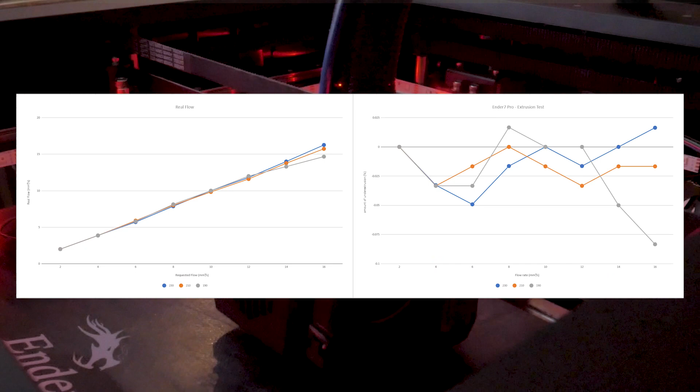And what this does is that it prints out a sequence of blobs at various temperatures, so 230 degrees, 210 degrees, and 190 degrees Celsius, and it increments the flow rate. Then you take the extrusion blobs, you weigh each one, and you insert those values into an Excel sheet that Stefan also made. The Excel sheet then plots the data, and what you should see in theory is a drop off between the requested flow rate and the actual flow rate.

The decline in actual flow rate, or under extrusion, should increase as the nozzle temperature drops. And this will become more prevalent as you request a higher flow rate from the hotend. Now, this is the general trend that I observed, but my data was not nearly as clean as Stefan's.

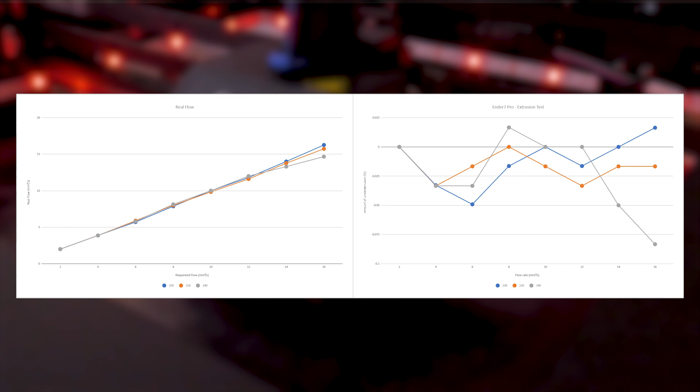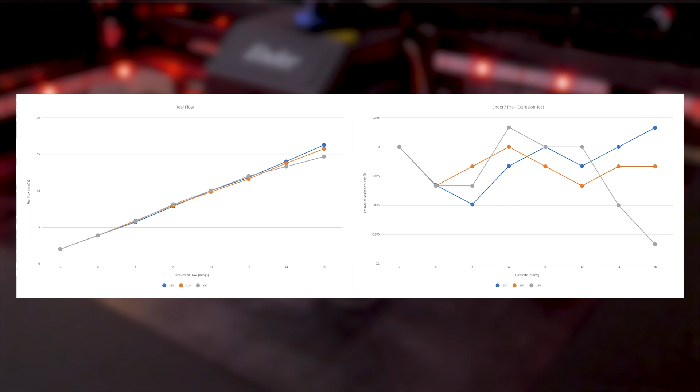I suspect that one of the reasons for this is that prior to this experiment, I was running a lot of carbon fiber filament through the brass nozzle, and I do believe that it is no longer a 0.4 millimeter nozzle. And so even with PLA, I experienced a lot of stringing and oozing, and I feel like that somewhat fouled my results. Also, as a result of the suspected larger orifice, I do believe that the flow rates are also skewed, and so I ran the test again with even higher flow rates to see if I could get an even more prevalent drop off in extrusion.

And according to this second test with the higher flow rates, you really see this hotend start to drop off at around the 18 cubic millimeters per second requested flow rate at the lower extrusion temperature of 190 degrees Celsius. The tests at the two higher extrusion temperatures of 210 and 230 degrees Celsius do not seem to drop off at all the way up to 22 cubic millimeters per second. And this is a much higher flow than what I've seen this hotend be able to do in practice.

And so when I go to tune my high-speed printing profiles in the slicer, I pay close attention to the volumetric flow rate. And before this nozzle got bored out by the abrasive filament, I would say that around the 15 cubic millimeters per second mark is when I started to see noticeable under extrusion in my parts with the stock Ender 7 hotend. Now, unfortunately, I didn't have a spare Ender 7 nozzle to run the tests more reliably, otherwise I would have.

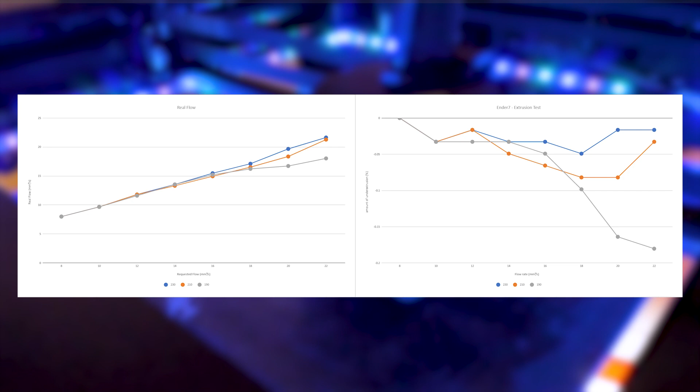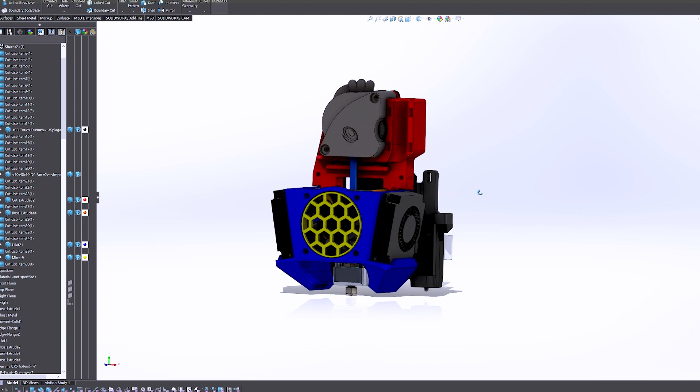And now that we have a slightly better understanding of where we're coming from, let's take a look at where we're going. This is my CAD mockup of the LGX Lite combined with the Mosquito Magnum hotend mounted on to the Ender 7 X-carriage bracket. This setup comprises four main parts. So in yellow, you have the fan grill. In blue, you have the fan ducts, which the part cooling fans mount to.

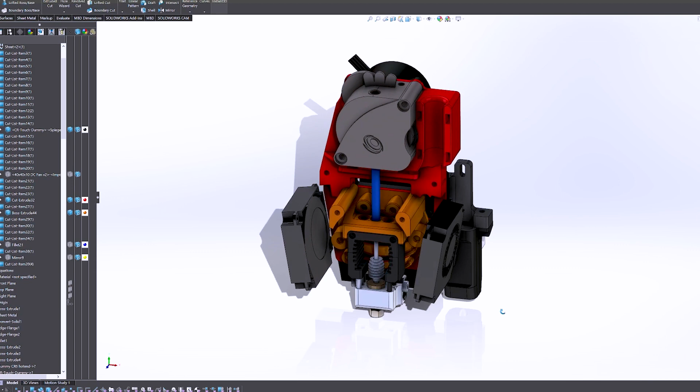And behind the hotend fan, you have the mount for the Mosquito Magnum hotend, and that's pictured in orange. I intentionally made this a separate piece from the red mount, which mounts the LGX extruder to the Ender 7 X carriage. And the purpose for this is that in the future, if I ever want to switch hotends, I can do that by simply swapping out that bracket, and in some sense, this makes this design modular. In the meantime, I suspect that the Mosquito Magnum hotend will more than meet my requirements.

Now we can begin with the disassembly of our current equipment, and the first thing you need to do is remove the filament from your Bowden tube. Just preheat your nozzle, use the lever to release the tension on the filament, and give it a good pull. And with the printer still on, lower the printer down so you have maximum access to the hotend from all angles.

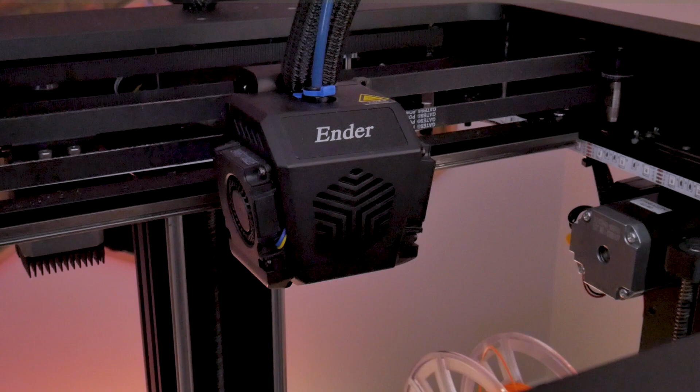Start disassembling the print head by removing the 4 screws that hold each of the part cooling fans onto the fan shroud. Be careful not to lose these screws, as we will be reusing them later. Now you can head to the back of the print head, where you can access the 2 M3 screws that secure the fan shroud. With those 2 screws removed, you can now simply pull the fan shroud off. There are 2 plastic tabs that hold the fan shroud onto the X carriage as well, so just be careful not to break those.

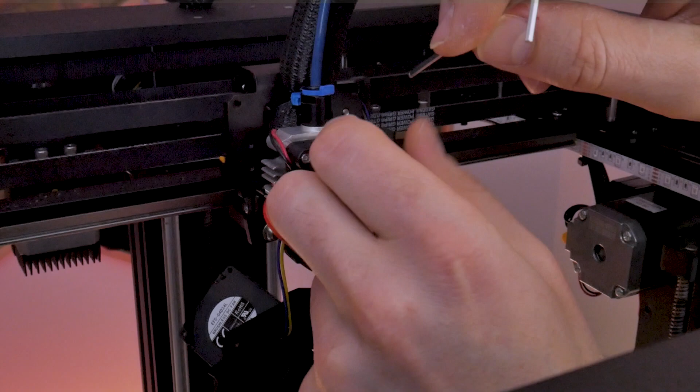This now exposes the heatsink cooling fan, and we can use our hex key to remove the 2 M3 screws holding the fan to the heatsink itself. There are 2 aluminum spacers wedged between the fan and the heatsink, and you will not be needing to reuse those, but they'll likely fall out during the removal of that fan.

Now you can remove the Bowden tube by removing the retaining clip, pushing down on the fitting, and pulling up on the Bowden tube. Now, it's not uncommon for the Bowden tube to get fairly stuck, and that's likely because of hardened plastic near the bottom of the tube. And so if you have to, you can turn your printer back on, turn your nozzle temperature up, and then pull on the Bowden tube, and it should release much easier. Just be careful, because you'll be working around some very hot parts.

Remove the heat block sock, and then take a look under the heater block for 2 small grub screws that are holding the heater cartridge and thermistor into place. Loosen them liberally. You can now remove the heater cartridge and thermistor from the heater block. Do not pull on the wires, as you may damage them. They could be brittle from all of the heat cycles. Rather, you can push from the other side using one of your hex keys.

Now you can remove the 4 screws holding the hot end into place, and you should be able to completely remove the hot end from the X carriage bracket. Cut any zip ties holding the wiring harness into place. My wiring harness might look a little different from yours because I've installed a CR Touch,

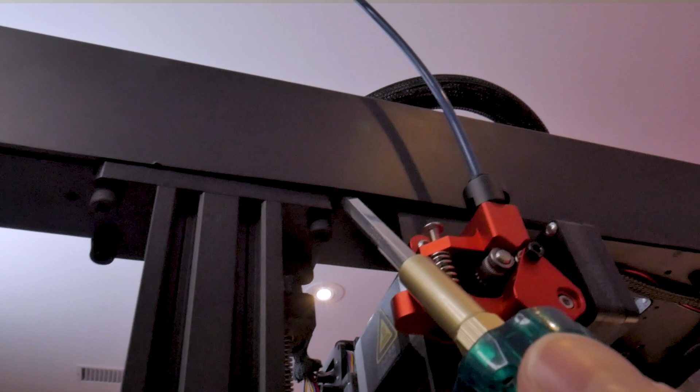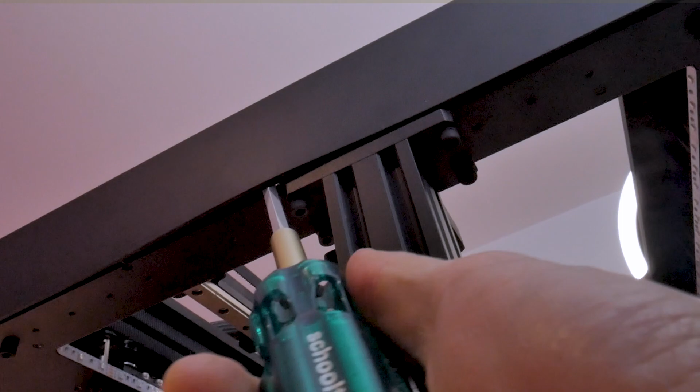Now we need to remove the plastic shroud at the top of the printer, and there are 4 M4 button head cap screws at the front and 4 at the back. After removing all 8 button head cap screws, take a look at the sides of the shroud beside the vertical pillars of the machine. There should be slots in the shroud, and you should be able to get a flathead screwdriver in there to pry up and release the shroud from the main plate at the top of your 3D printer. It can be frustrating to get this piece to finally release, so take your time and try not to break it.

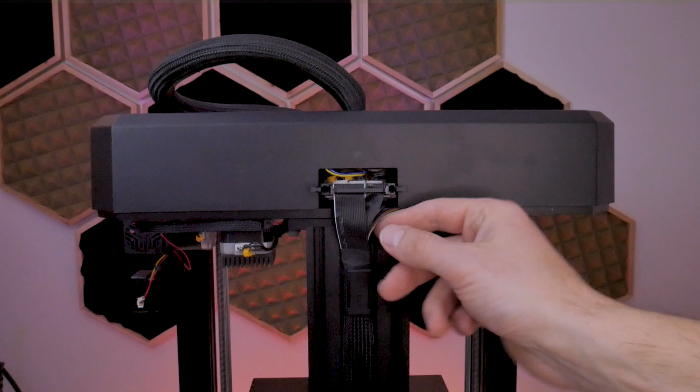When you do finally get it to release, move to the back of your printer and remove the large electrical connector. You can now access the breakout board where all of your printhead connections go to. It's a tight space to work within, so we're going to take a look at which connections we have to remove, and I'm going to do my best to get some good shots of that.

I'm going to be disconnecting all of the connections that run back to the printhead, and that white one that I just had in my hands there, that is for the thermistor. There is the red and black wires that go to the extruder fan. There's the 2 thicker large red wires, and that is your heater cartridge. And beside that, you see blue and yellow wires. There's 2 of those connectors, and those are the part cooling fans.

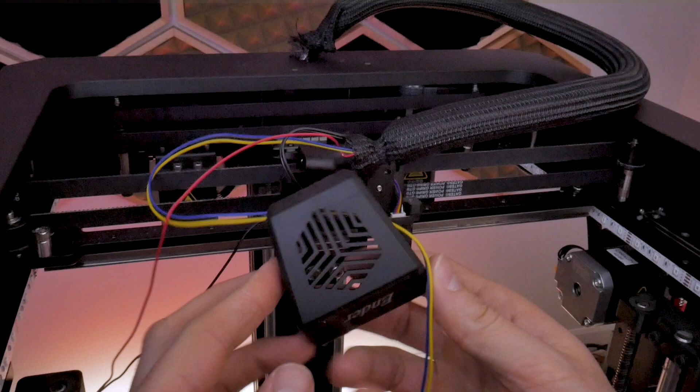And then beside that, there is 2 black wires with a label that says X on it, and that is the X limit switch. If you look very closely on the PCB, all of these connectors are labeled, and some of the wires have labels on them as well. I'm going to be pulling all of these connections out because I'm going to be running a new wire loom. But if you plan on reusing the Creality wire loom, you only have to pull a few of these out.

The one that you see me pulling out right now is the part cooling fan on the left hand side of the fan shroud. The reason you have to pull this one out is because we're going to be printing off a new part cooling fan shroud, and the only way to get that fan to release from the existing fan shroud is to pull it through that whole connector side out first.

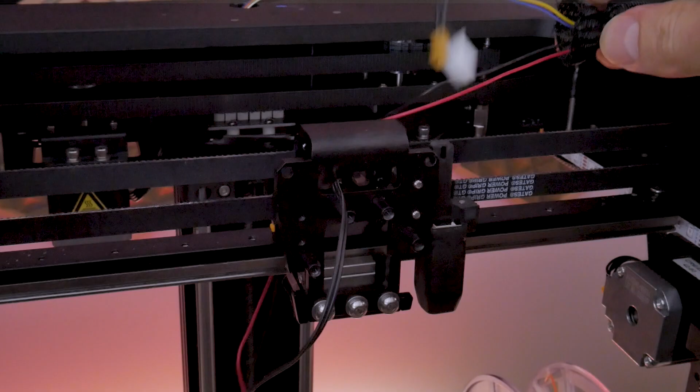At minimum, you will also need to pull out the existing heater cartridge wire, as well as the X limit switch wire. And in my case here, I'm running a CR Touch, and so I'm going to pull that one out and through that little window in the X carriage bracket. What you should be left with is a very bare looking X carriage bracket ready for the new parts to be mounted. And speaking of new parts, let's take a look at what we're going to be installing.

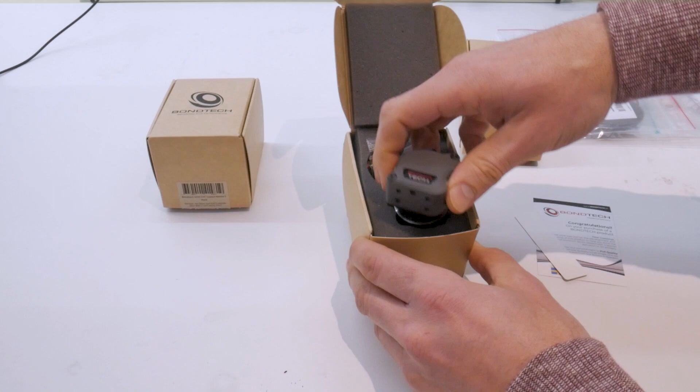So first up from Bondtech is the LGX Lite extruder. It comes nicely packaged in this box, safely sitting in a generous amount of foam. And included with the LGX Lite extruder is some mounting hardware for the extruder itself.

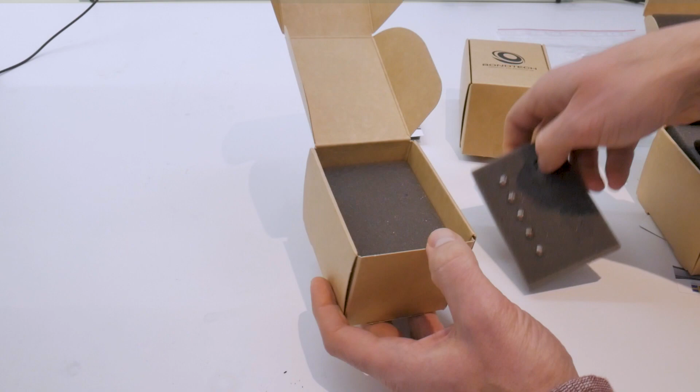Bondtech also sent me their CHT coated brass nozzle pack. So this comes with 5 different nozzles in the 0.6, 0.8, 1mm, 1.4mm, and 1.8mm sizes. And that is definitely going to be for some high flow applications in the future. For the time being, I'm going to be testing the machine with the regular 0.4mm CHT nozzle, and we'll take a look at that in a second.

And in the final box is the Mosquito Magnum hot end from Slice Engineering. Now, I don't know what type of packaging this is called, but oftentimes I see it used in machine tooling. Either way, it is very difficult to get open. But I guess it ensures that your parts arrive in one piece and in good condition. I've also heard that these lollipop things that they include are absolutely phenomenal, but I've yet to try them.

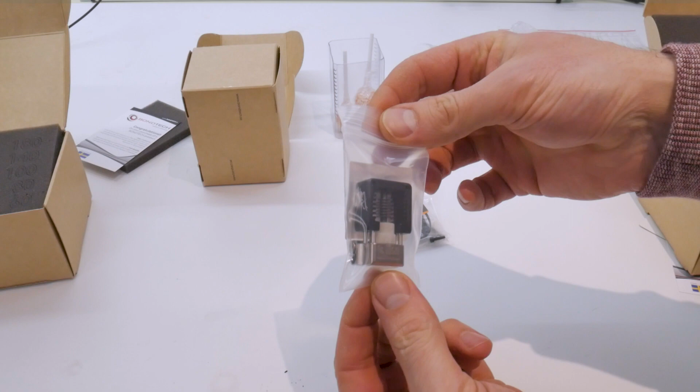What I'm definitely more excited about is the Mosquito Magnum hot end itself. Now, I've used this hot end before in another kit combined with a Bondtech DDX extruder in the past on a Creality Ender 5 Plus, and it was phenomenal. So I'm expecting similar results.

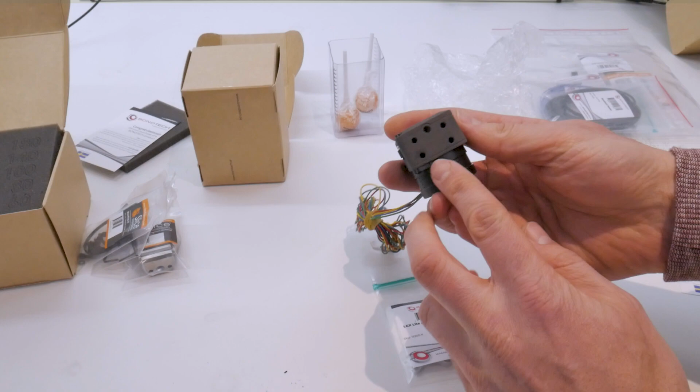Bondtech also sent me this aluminum mount that allows you to mount the Mosquito Magnum hot end directly to the bottom of the LGX Lite extruder. Now, I won't be using this bracket and you won't be needing it for the Ender 7 application, but it is something that they sell on their website if you're cooking up your own custom application. In addition to all of the main components, Slice Engineering and Bondtech also provided me with all of the smaller bits and pieces like the heater cartridge, thermistor, boron nitride thermal paste, etc.

Before assembling anything like I did here, there's a couple holes you're going to need to tap for M3 threads. So these 2 small holes underneath of the extruder at the back of the extruder mounting bracket, as well as this hole here on the hot end mounting bracket, this one here, and that one there. If you don't have an M3 tap, the threads from the M3 screws will likely self-tap into plastic anyways.

Now we can jump into the assembly of these parts, and the first thing you are going to need to do is remove the 2 screws holding together the Bondtech LGX Lite extruder. Keep a firm grip on the entire assembly, because once you remove these 2 screws, the whole thing will fall apart in your hands if you don't have it all clamped together. You can flip the extruder upside down, simply remove the motor.

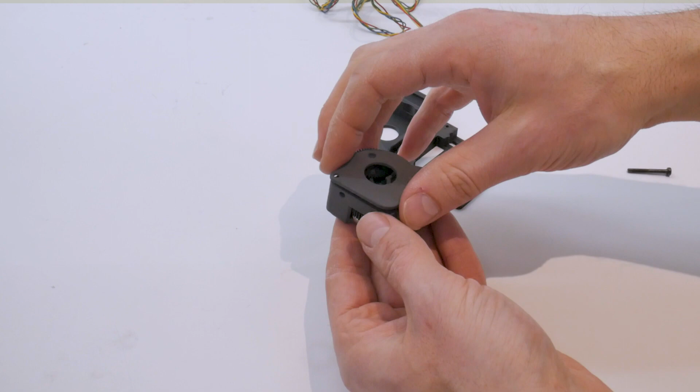Now you're going to remove that middle spacer plate, and you're going to be replacing that with the 3D printed bracket for the LGX Lite that I've provided for you guys in the video description down below.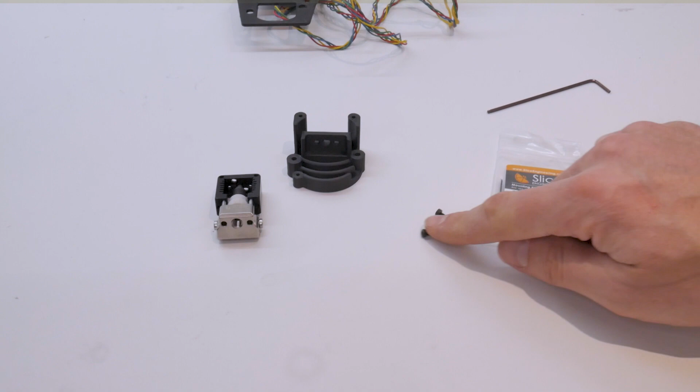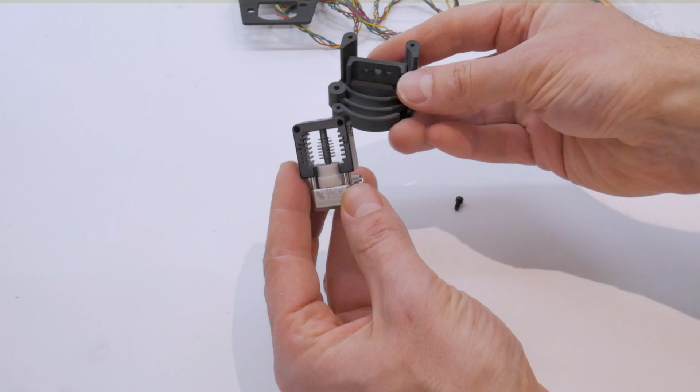Now we can take the Mosquito Magnum hot end along with the 3D printed bracket and the M2.5 by 6mm long socket head cap screws from the Slice Engineering Mosquito Magnum mounting kit, and we're going to combine these items. So you're going to take that Mosquito Magnum hot end, slip it into the bottom of the bracket like so. You're going to have the Slice Engineering logo facing forwards, and then in the top 2 outermost holes, you're going to install those M2.5 socket head cap screws, and they should fit right through the top of the mounting hole locations in the top of the Mosquito Magnum hot end.

This mounting bracket sits very close to the heater block on the hot end, and so you're going to want to print this part in a material with a higher heat resistance than something like PLA. Air from the extruder fan is constantly blowing over this part through the heatsink, but I wouldn't take any chances and still try and print it in the highest temperature resistance material that you can.

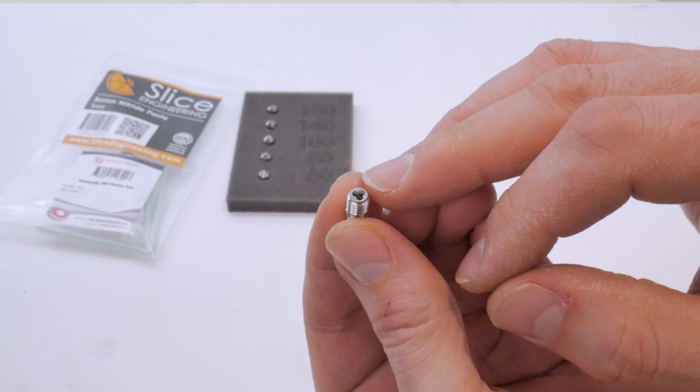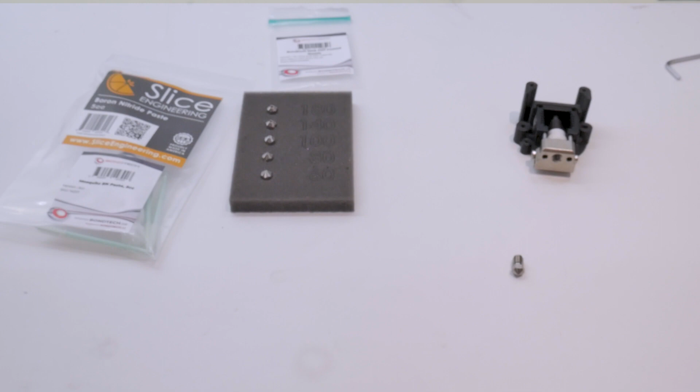Installation of the nozzle is next, and I've already showed you guys this nozzle pack from Bondtech, and so these are coated CHT nozzles, and CHT stands for Core Heated Technology. This is a very interesting concept from Bondtech, and you can see the 3 cross-drilled holes inside of the nozzle. This will effectively split up your filament into 3 separate channels, increasing the amount of hot surface area that your filament is touching, which should provide you with a higher melting rate.

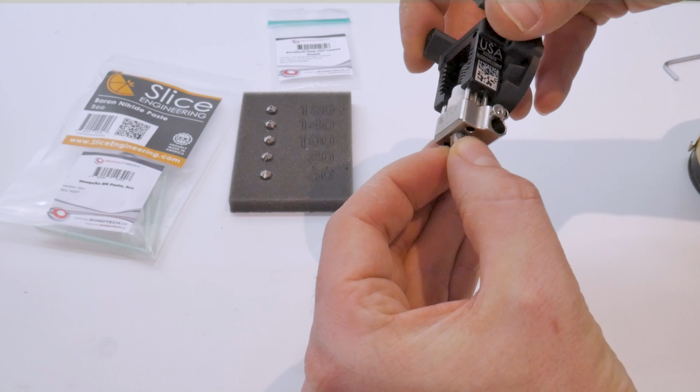Now I'm going to be using the 0.4 millimeter nozzle for the hot end benchmarking test, and these nozzles are coated in nickel, so that's not going to greatly increase the resistance to abrasive filaments, but it is supposed to decrease the friction and increase the flow rate. I believe on the Bondtech website they do say that they will be coming out with hardened versions of these nozzles in the future, so be on the lookout for that. But in the meantime, other hardened nozzles will fit as long as you have the correct thread and thread length.

Now we can install the thermistor and heater cartridge. The thermistor is rated to 300 degrees Celsius and the heater cartridge is the 50 watt version at 24 volts. I'm going to be showing the Bondtech thermistor being installed into the hot end. However, at the time of the making of this video, there is no firmware available for the Ender 7 that will accommodate the 300 degree thermistor from Bondtech.

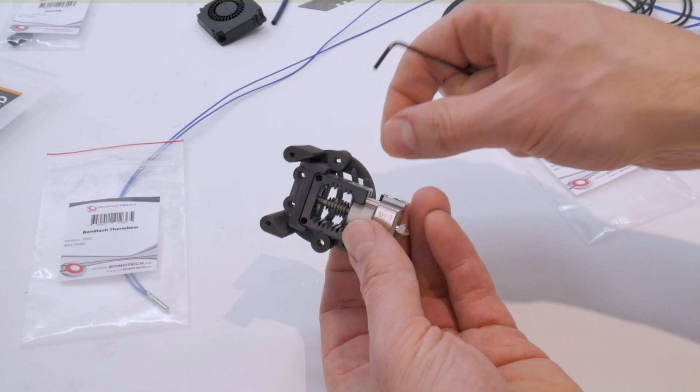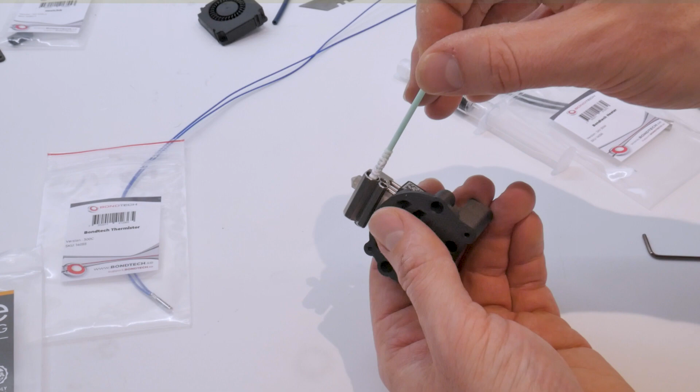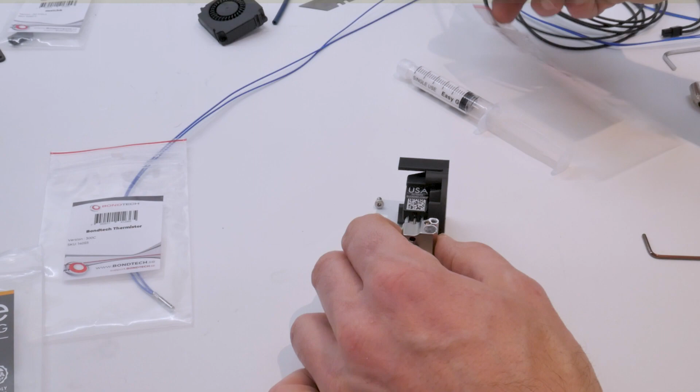I compared some of the resistance tables between the Bondtech thermistor and the Creality thermistor, and at around the 220 degrees Celsius mark, there would be about a 15 degree difference between the two, and so I decided not to run the Bondtech thermistor for now. Until I migrate to Klipper firmware, I'm going to continue to use the Creality thermistor, and this is unfortunately going to limit my nozzle temperature to 260 degrees Celsius, but at least the readout will be accurate for now. Hopefully Bondtech or some other third party will eventually release a Marlin configuration file that's compatible with the Ender 7 so you can switch thermistors.

While I've been talking about the thermistor details, you can see in the video clip that I've removed the single retaining screw on the side of the heater block that retains both the heater cartridge and thermistor, and now I'm applying some of the boron nitride thermal paste to the inside of those bores.

The Bondtech thermistors usually come with a small filler piece that slides in before the thermistor, and this takes up the remaining space inside of the thermistor bore. My package did not seem to come with one, and so I'm going to be relying on that boron nitride thermal paste to dry up and retain the thermistor along with the single retaining screw. That in combination with some good wiring management, and I don't suspect that my thermistor will be moving around at all.

At this point, you're also going to need to cut a small piece of PTFE tubing to go between the hot end and the extruder. This piece should be cut to 38 millimeters in length. Make sure you cut the ends as square as you can, and having one of these PTFE tube cutting tools is very handy. You can find printable versions of these tools online, and they can be downloaded for free.

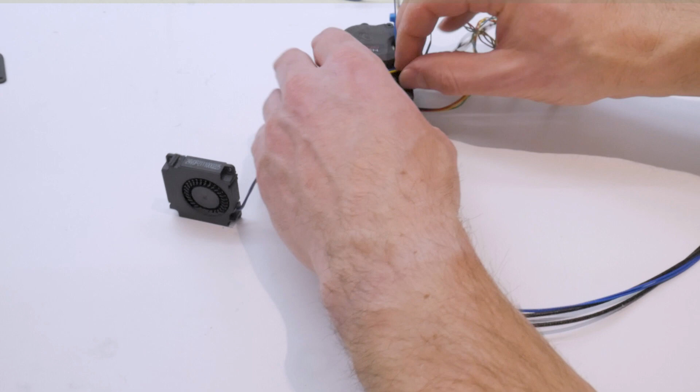The PTFE tube will drop right in through the top of the hot end mounting bracket, and then you can go get the left side part cooling fan that you removed from the wiring harness earlier. The reason that you need this fan right now is because we're going to be taking the wiring and putting it in through part of the cable management system that's built into the LGX mount. I integrated this wiring channel into this bracket to clean up the wiring a little bit, and it runs behind where the PTFE tubing will be situated.

So we need to get this wire inside first. You can simply just push those wires down inside of that channel and leave enough slack on the fan end for the installation of the fan. And then you can take the two pieces and slide them together so that the PTFE tube now also inserts into the bottom of the Bondtech LGX Lite extruder.

If you cut your PTFE tube to the correct length, all of the holes going through both of the brackets should now line up. Bend your thermistor and heater cartridge wires up into the strain relief portion of the LGX mounting bracket and loosely retain them with zip ties.

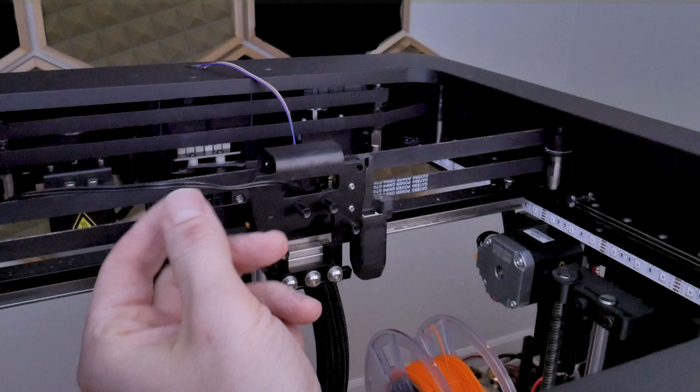Take your assembly back over to the printer and then grab your X limit switch coming through the window of the X carriage bracket, and now you're going to slip that X limit switch connector through the window on the Bondtech LGX Lite extruder mount. Fish that connector and wire up through the strain relief portion of the LGX mounting bracket, and then you can take the entire assembly and slip it right directly on to your X carriage bracket. Your new equipment should slip directly on top of the mounting posts on the Creality X carriage bracket.

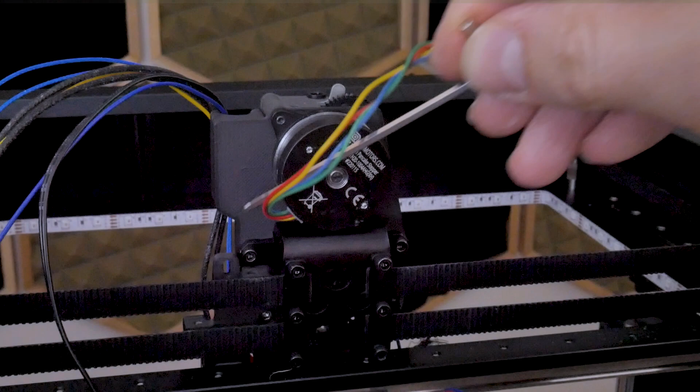At the back of the printhead, you can now take some M3x10 socket head cap screws and install them through the holes that were originally holding the original Creality fan shroud into place, and these will thread directly into the LGX mounting bracket.

In this clip, you can also see the orientation in which I clocked the LGX extruder motor such that those wires will be facing downwards and to the left, and this will make for a very clean wiring installation as well. And now we can take those wires and that connector from the motor and we can fish them under and through the X carriage bracket and out the front side of that little window.

On the front side, your motor wiring harness will pass up and through the strain relief bracket, and right now in the opposite direction, I'm feeding down the CR Touch wiring harness. If you're running a CR Touch like I am, then that connector will pass through the window in the opposite direction towards the back of the print head. It can then be wrapped around the X carriage bracket and plugged back into the CR Touch module.

And now you can secure the hot end mounting bracket using two M3 socket head cap screws. Anything from 6 to 10 millimeters in length will be sufficient.

You can also see here that I have the extruder fan and the right side part cooling fan hanging in place, and those wires are also passing through the strain relief. I'm going to start pulling on these wires and positioning the fans such that the wires have enough slack they should be able to reach their positions on the fan shroud.

Now I can take the fan shroud and the grill will simply just pop into the fan shroud. There are two retaining clips and you'll see the receptacles for them on the fan shroud, and it should just push itself into place and not come out. It will be very secure.

Then you can take the two part cooling fans and face the outlets of the fans down into the fan ducts. On the left-hand part cooling fan, the wires should wrap themselves behind the part cooling fan and through the channel on the part cooling fan shroud. On the right-hand side part cooling fan, you'll find that the wires are aligned with the rear of the part cooling fan shroud, and so there's a much smaller channel that the wires will run through.

Secure the part cooling fans with the original hardware. Those M2.5 screws will self-tap into the part cooling fan shroud. Note that on the left-hand side part cooling fan, the bottom left-hand corner screw will not be used. So you will only use 3 of the screws on the part cooling fan on the left-hand side.

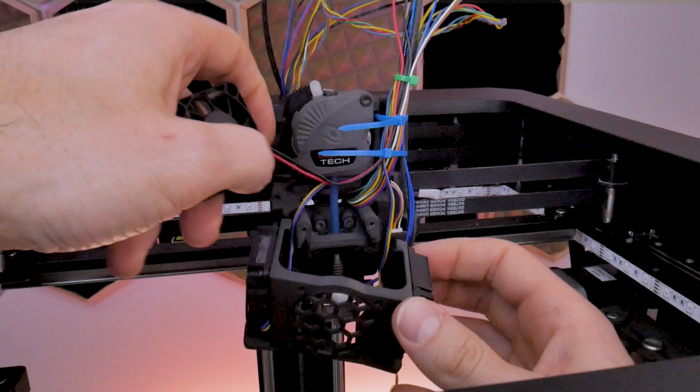Now as for the extruder fan, this will be positioned in between the part cooling fan shroud and the hot end. In this video clip, you're going to see me rearrange some of the wires, and you're going to need to push those thermistor and heater cartridge wires inwards such that the part cooling fan shroud can wrap around them. And you're going to want to make sure that none of the wires are pinched. It is a tight fit, but everything will fit.

I had to design the system such that all of the new equipment fits within the original envelope of the Ender 7 printhead. And this is because the amount of space available inside of the printer frame is extremely limited. Anything outside of that original envelope will result in interference and reduce your print volume. Now this machine has an XY area of 250 by 250 millimeters, which isn't too bad, but every millimeter counts and we don't want to lose any space.

Once you have everything successfully positioned, you will need two M3 by 25 millimeter socket head cap screws, and those will pass through the front of the fan shroud, through the extruder fan, through the hot end mounting bracket, and into the original Creality posts that everything slipped over.

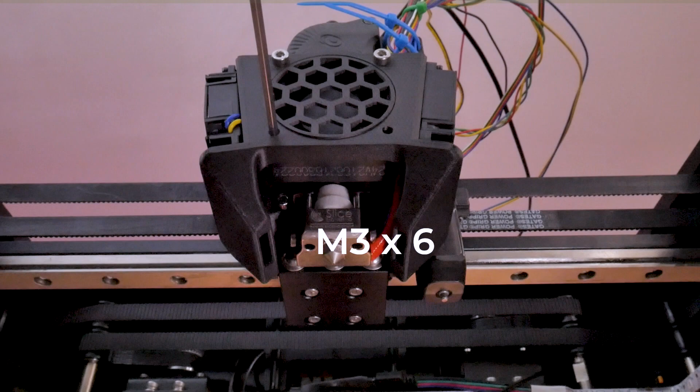Once you have the two top screws in place, there is a third one hidden in the bottom, and you can just kind of see it shining through there, and it looks a lot trickier than it actually is. So you can take your hex key and you can pass it through the bottom left hole of the fan shroud, and this is where you would tighten that. But to get that screw in there, you can just simply use some needle nose pliers, put it up into position, and then you can use the hex key to tighten it into place, and that hole will hold your hex key in place while you do this. Like I said, it looks trickier than it actually is.

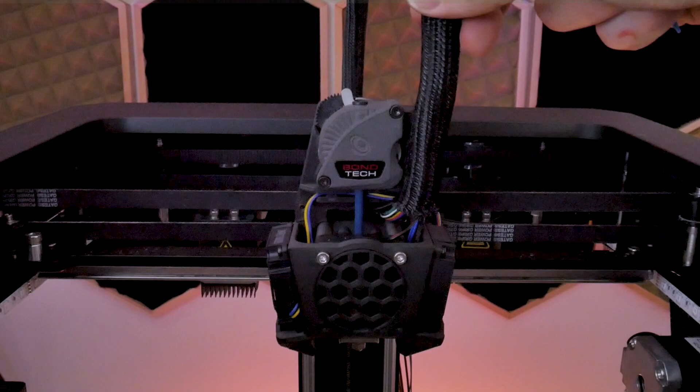With everything secured and in place, you can rewrap your wiring harness. I would suggest something like a split loom that's much easier to get the wires through. And then you can use your zip ties inside of the strain relief, and you can just push those zip ties in one end and they'll come out the other side because it is a continuous hole. And then you can secure your wire loom in place inside of the strain relief, and that's going to keep any of those wires from being tugged on.

The wires for the left-hand side part cooling fan should still be routed through that channel behind the PTFE tube, and that's going to keep those wires from touching anything hot, and it makes the whole assembly look a little bit neater and more organized.

Back at the breakout board, we're going to remove two more connectors, and so this one here labeled E is your extruder motor, and we're going to remove that connector.

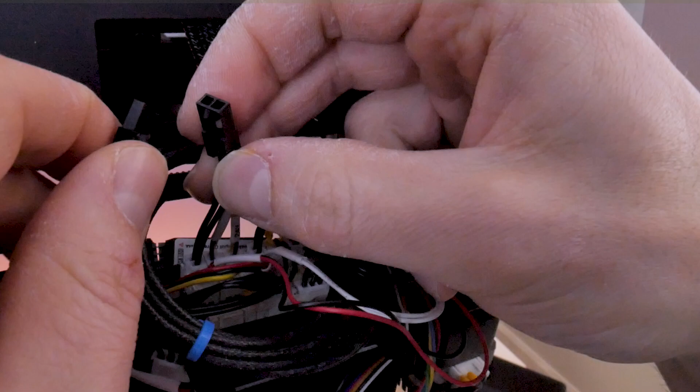Oftentimes you'll find glue attached to these connectors, so you're going to have to rip that glue off in order to remove the connector. Carefully remove this connector along with the one just in front of it with the black and red wire. That is the connector that powers the fan that constantly blows on the extruder motor on the side of the machine. And so now we can start reconnecting all of the wires from the printhead.

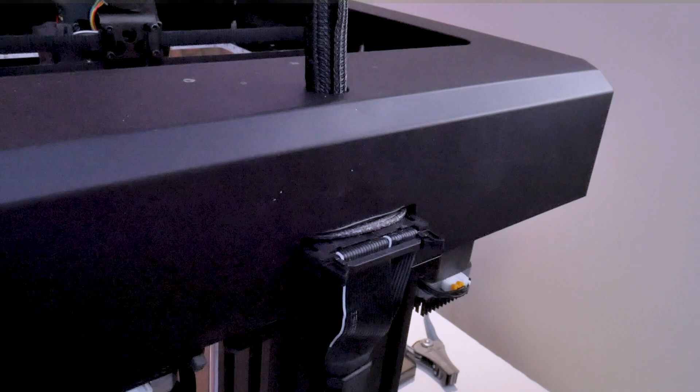So that wire bundle on the right hand side is coming in from the printhead, and those wires have been fished through the black cover that covers all of the belts on the Ender 7. I'm going to start by reconnecting the connector with the two black wires labeled X, and this is the X limit switch, and you can see how it goes right beside the other two limit switches labeled Y and Z. After that, I'm going to reconnect the extruder fan, and so this is the connector with the black and red wire, and you'll see where it gets inserted here.

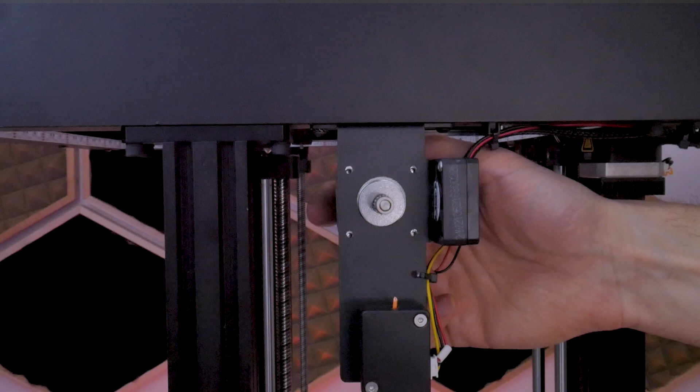After that, there are the two part cooling fans, and those are the wires that are yellow and blue. Again, there are two of them for the left and right part cooling fans, and those will get inserted up at the top row beside the limit switches. Earlier in the video, I mentioned I'm going to be reusing the original Creality thermistor, and those are the two white wires, so I'll make those connections off camera.

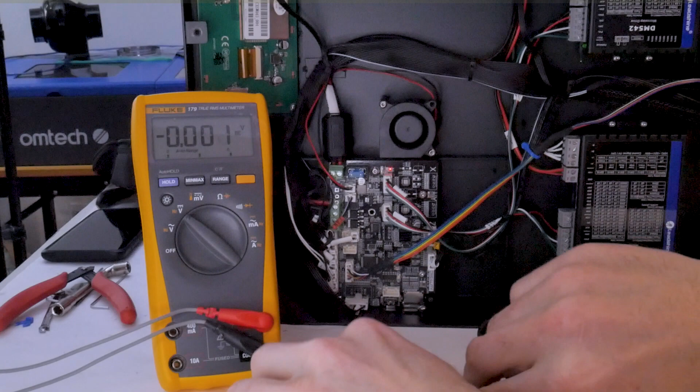The heater cartridge connection is next, and Bondtech offers this product called HeatLink. These are very convenient adapters that will adapt the connectors on the end of the heater cartridge wires to the connectors that come on your machine. So in this case, I got one that converts the heater cartridge connector to a JST XH connector, because on the Creality board, all of these connectors are of the XH series from JST. And as you can see, it now simply just plugs into the Creality board, and I do not need to repin or terminate any of those wires.

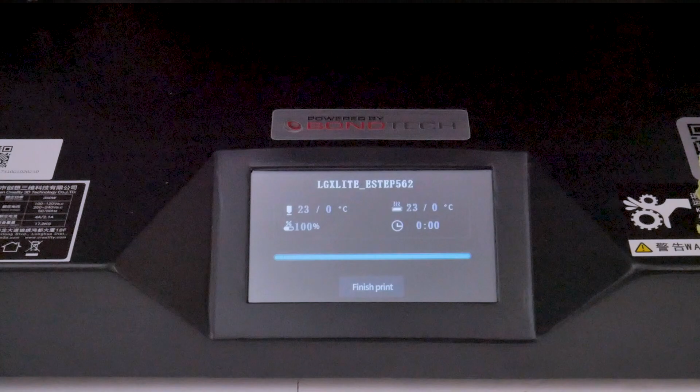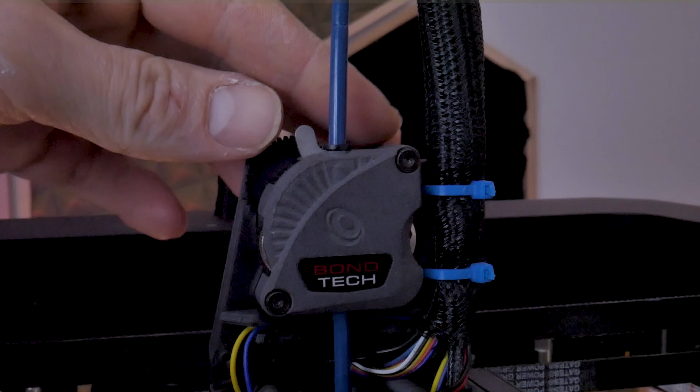Last but not least is the extruder motor connector, and this is going to plug into the original receptacle. But before you can do that, you're going to need to reverse the motor direction, and to do that, you can swap two of these pins. So the yellow and blue wires can be swapped, and you can do that using a hobby knife or another sharp tool. There are lots of good videos online on how to repin these connectors, and I had the same problem on the CR10 Smart when I did the LGX Lite install on that in a previous video. But now you can see those two wires are swapped, and you're ready to plug the connector back into the board. And this will now ensure that your extruder runs in the correct direction.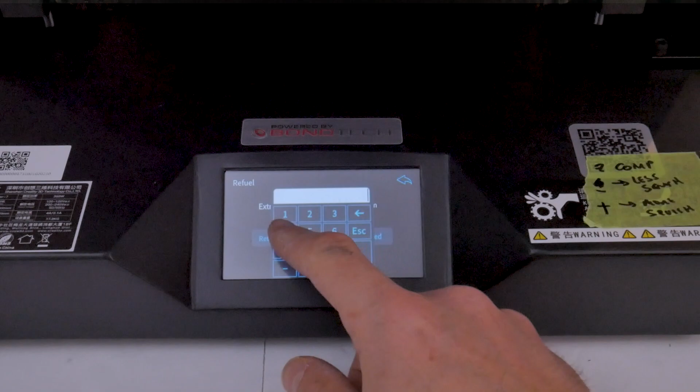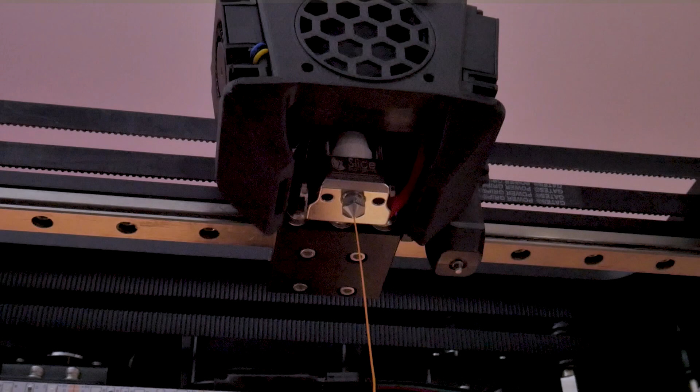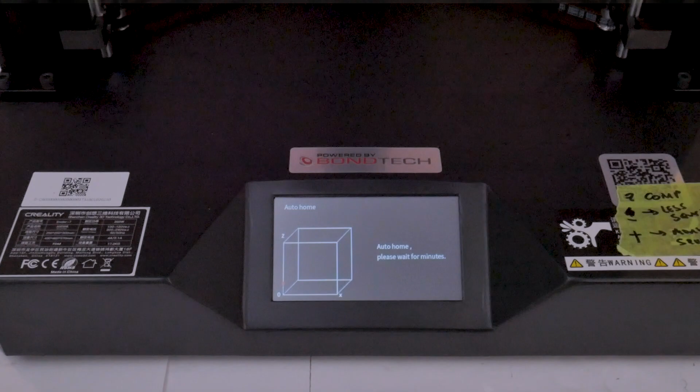Tidy up your wiring and put the original ribbon cable connector back into place at the back of the printer. Secure the belt cover of the machine with the 8 button head cap screws, 4 in the front and 4 in the back. Since we are no longer using the extruder motor on the side of the machine, you can remove that motor, and you can remove the tensioning arm and just use this piece as a filament guide. When remounting the base of the extruder motor mechanism to act as a filament guide, because there is no extruder motor present for the hardware to thread into, you will need to get 3 M3 nylon locking nuts to take the place of the extruder motor.

Alternatively, you can leave the extruder motor in place and just remove the tensioning arm such that it does not impede the path of the filament when you're using the extruder mechanism as a filament guide. But I still would recommend trying to remove everything. It's nice just to get all of this clutter out of the way since we're not using it anyways. Plus, if you're anything like me and you have lots of different projects on the go and many different 3D printers, you might find that a spare stepper motor comes in handy in the future.

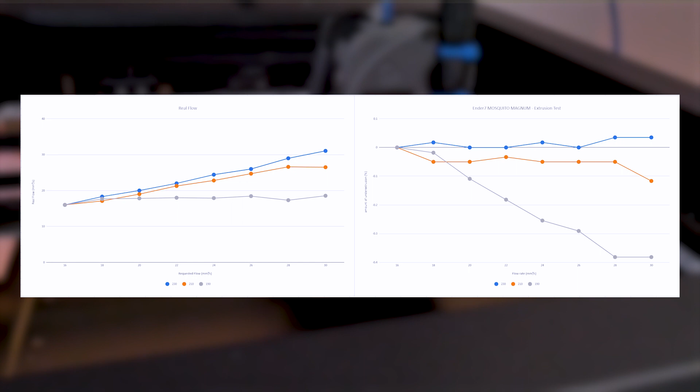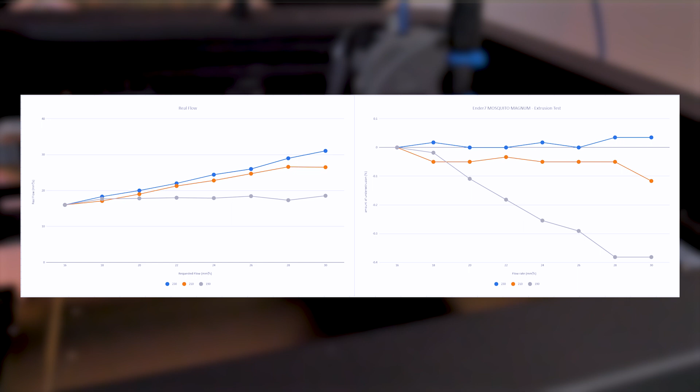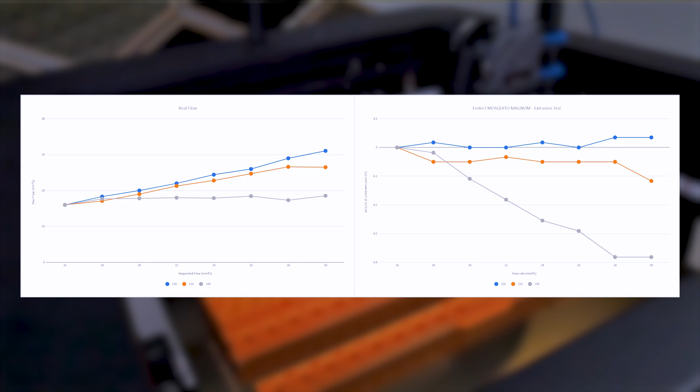When you're finished reinstalling the base of the original extruder motor assembly, you can now take your original PTFE Bowden tube and insert it back into the fitting at the top of this assembly. The other end of the tube will be inserted into the fitting at the top of the LGX Lite extruder. Before we can start printing, there are a few other considerations, and one of them is the reference voltage on the stepper drivers. The LGX Lite uses a small pancake style stepper motor that is considerably smaller than the very large 60mm stepper motor that comes with the Bowden tube setup on the Ender 7.

Therefore, we need to reduce the voltage reference on the stepper driver to reduce the amount of current going to this smaller motor, as we do not want to damage it and burn it out. Looking under the hood of the Creality Ender 7, you'll find the main board and you'll see the stepper drivers with the small heat sinks on top of them. The X and Y are missing as they have their own dedicated drivers external to the main board, and the Z and E are clearly visible here, the lower one being the extruder motor.

You'll see me pointing to the trim pot, and this is what we're going to need to adjust in order to reduce the VREF, or what's known as the reference voltage, such that it reduces the current to the stepper driver. A small screwdriver will do the trick, and you're going to want to turn this screw in the counterclockwise direction. You're also going to need a voltmeter to measure the voltage on this trim pot. The negative probe of the voltmeter will go to any ground connection on this board, and the positive probe of your voltmeter will go right in the middle of this trim pot.

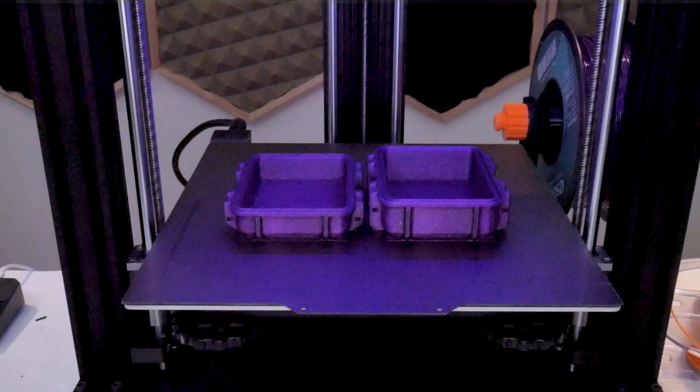Based on calculations from a previous installation of a Bondtech LGX Lite on a Creality CR10 Smart, the optimal voltage reference for the drivers that Creality uses on the silent boards is about 0.9 volts. Prior to printing, you will also need to make adjustments to the E-steps. This can be done by connecting your machine to a computer and running a print host, and then using some G-code commands to manually change your E-steps to 562 steps per millimeter.

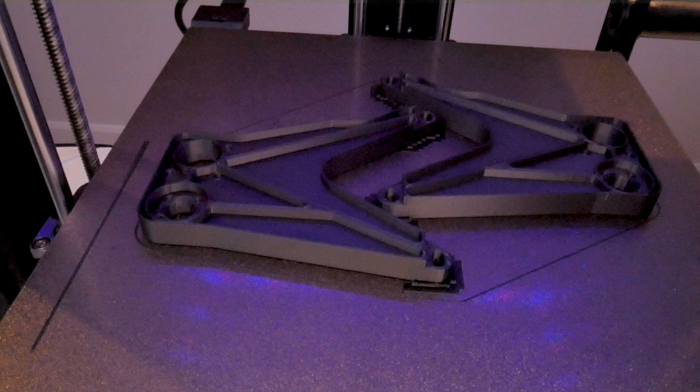Prior to printing, you should also preheat the hot end and do a final torque on the nozzle tip while hot. And because you have a completely new hot end, I would also highly recommend running a PID auto tune, and there are tons of videos about how to do that online, and on the Ender 7 it is no different than any other Creality machine. Once I was done with all of that, I could prime the nozzle, then let the nozzle cool down. I left the heated bed on, and then I could get into the bed leveling process, because you're going to want to reset your Z offset.

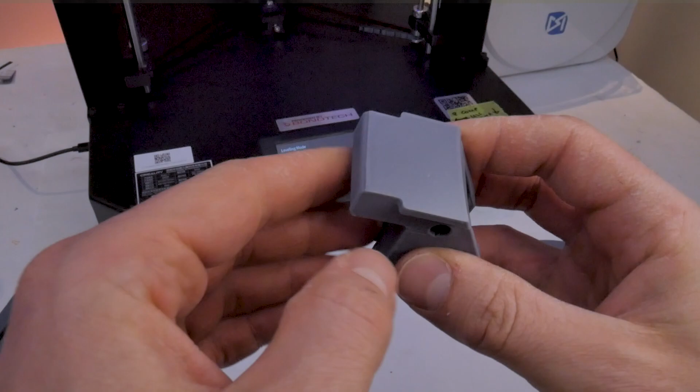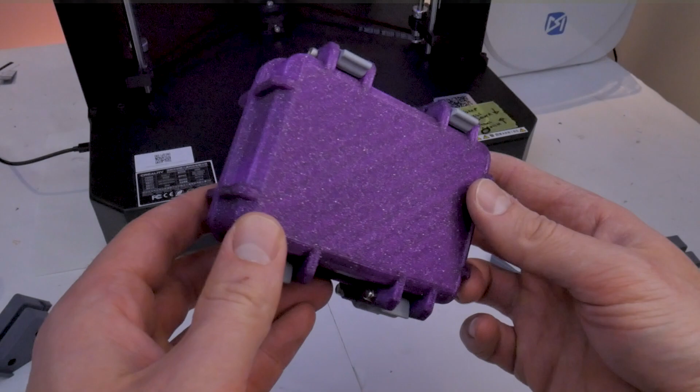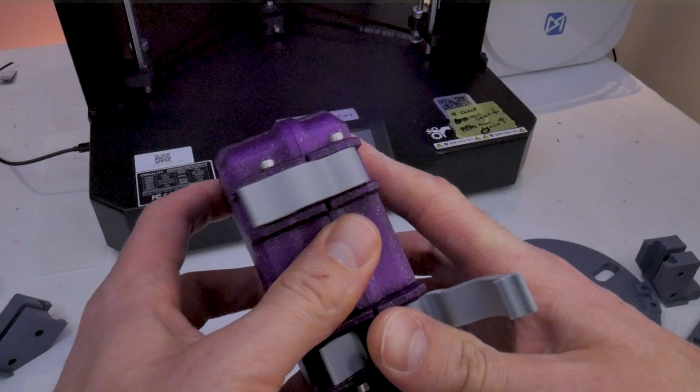Instead, we're going to get right into printing some more blobs so we can benchmark this new hot end. I started with flow rates from 8 to 22 cubic millimeters per second on this extruder and hot end combination, and it showed absolutely no signs of slowing down. I had a lot more extrusion control this time around because I didn't have a worn out nozzle, but my data still wasn't quite as clean as Stefan's from CNC Kitchen, but that's okay. I still saw no signs of this extruder giving up at 22 cubic millimeters per second, so I decided to keep going.

I reran the test from 16 to 30 cubic millimeters per second, and this is where I started to see some drop off. What's strange to me is that the drop off started around the 18 cubic millimeter per second mark, which I didn't see in the previous test because there is some overlap between these two tests. The only variable here that changed was the filament. Now I didn't go to a different brand or a different type. I stuck with the eSun PLA Plus filament, but I only changed the color from orange to gray.

Now I'm not a filament expert, so I have no idea if some of the properties within the filaments themselves between different colors would change the flow rate, but I did see a difference here. That being said, the massive under extrusion occurred at the lowest melt temperature of 190 degrees Celsius, which makes a lot of sense because that's very low considering these high flow rates.

At 210 degrees Celsius, the drop was about 5% of under extrusion through most of the range of this test, and at 230 degrees Celsius, there was absolutely no drop off at all. On the Slice Engineering website, they claim that the Mosquito Magnum hot end can deliver between 30 and 35 cubic millimeters per second of flow, depending on certain variables like the temperature, filament, etc. Based on the results of my test, I would say that is completely plausible, as I'm seeing easily 30 cubic millimeters per second of flow with a 0.4 millimeter nozzle at 230 degrees Celsius.